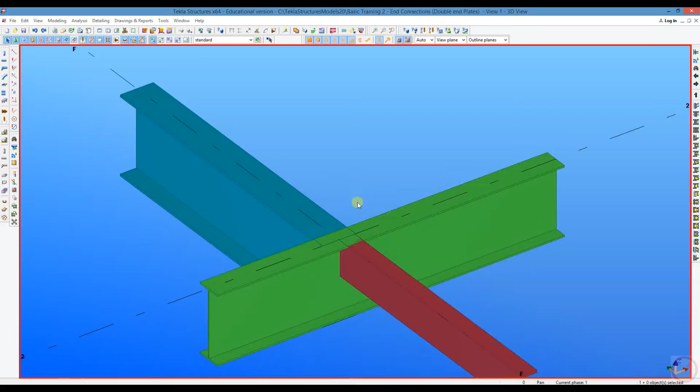Training number 2, end connections. Today we'll be discussing double end plates. Now, a double end plate is when a beam such as this needs to have an end plate on either side. That's a wee bit... nice sizes. Should make that one smaller.

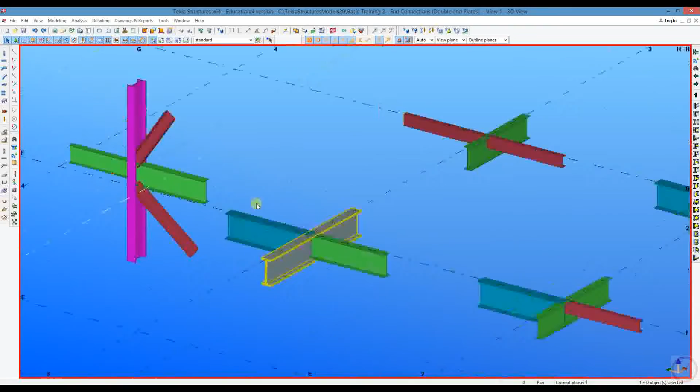Alright, so what I did here was set up a wee bit of variety. We've got a couple of different scenarios. So let's start with opening up the double end plate. It can be found here on page 1. Second connection, two-sided end plate 142.

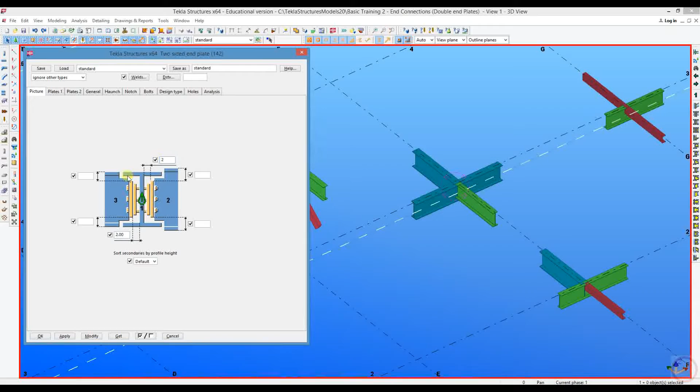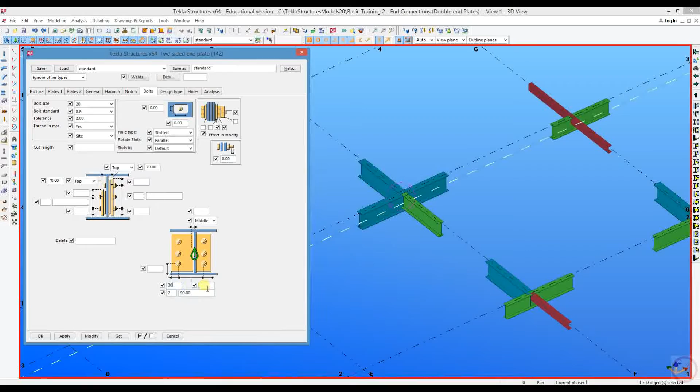Now, to start off with, I'm going to put in the standard 2 clearance. I'm going to make sure both plates have a thickness of 10, and then we get to the bolts. M20 8.8 2 tolerance. Okay, from top of beam, our first bolt will be 70 down. Now the amount of bolts, of course, is dependent on the beam that it goes into. Do 90 cross centers with 30 on a side, and before I do the rest, I'm going to put it in so long.

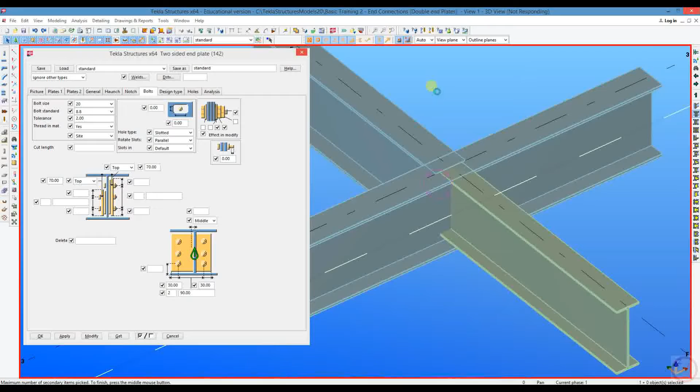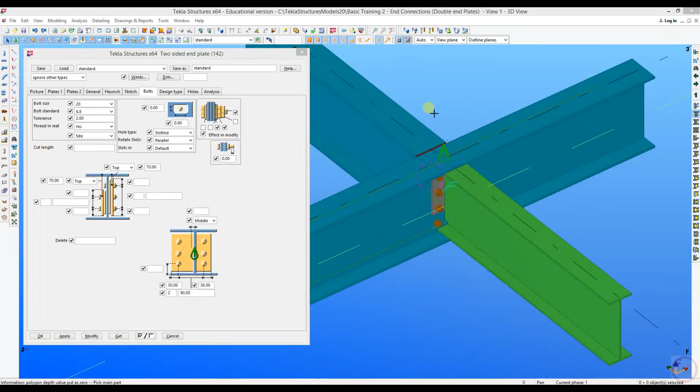Now, as you can see here, this connection, well, doesn't want to put in. Normally when this happens, it gives you a small menu. Just cancel it, do a quick undo, and put it in again. So the first time round, the computer can't calculate everything as it should. The second time around, usually it will work.

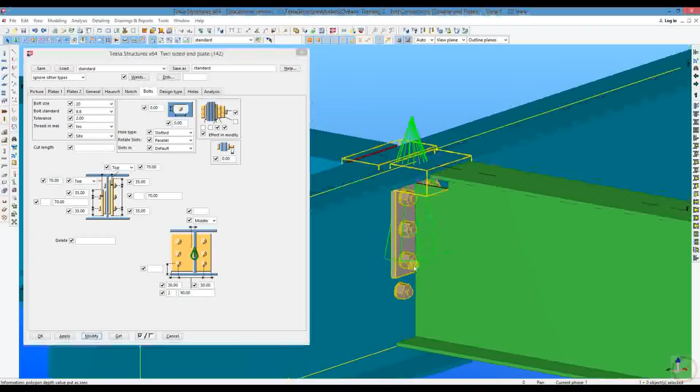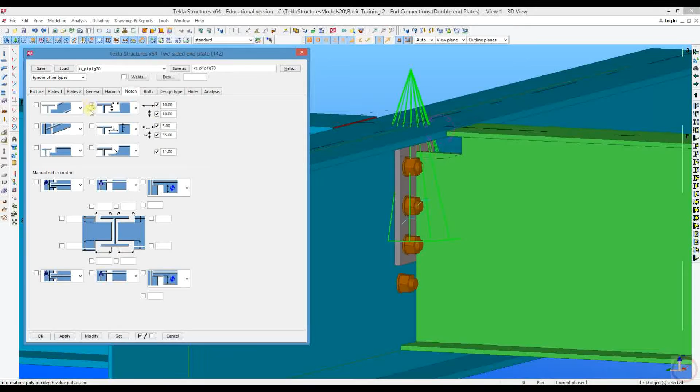Good. Now, next, we are going to put in 70 for the distance between the bolts, the standard 35s to the bottom and top of the plate. Now, before we get to the bolt amounts, as you can see, the notch is not exactly correct, so I'm just going to go in here and say I'm not in the mood to set up all of this. Normally you'd pick your choices, fill in the information. I'm just going to take one, load it, and I don't want any of the other information, only these ones. Modify. Excellent.

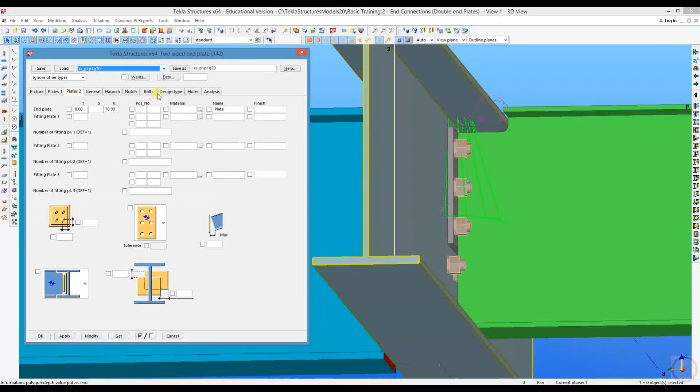Now the reason I don't use any of the other information is because, as you can see here, it does give length of the plate as well as the thickness. Unfortunately, all these plates have a thickness of 8, which we do not use. Okay, so now that I've done that, I'll just double click or say get to get all my settings again. Go back here and start working out according to 4.5.

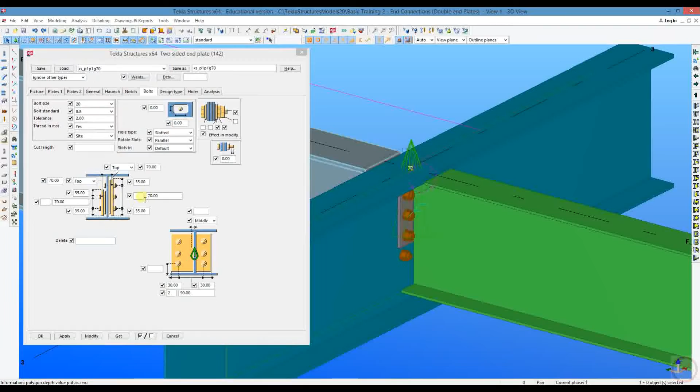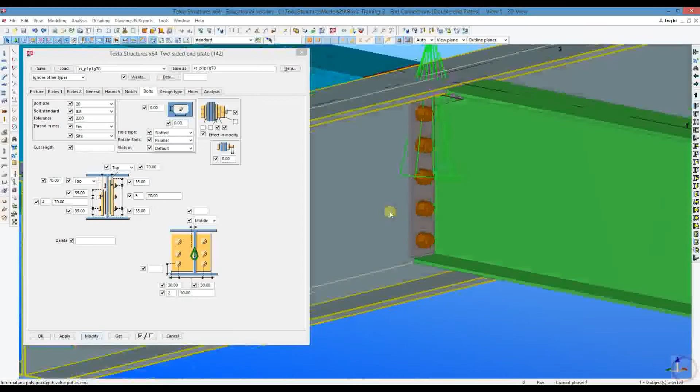This is 5 bolts. I'm just going to pick one side, put in 5, see what it says. Does it for both sides. Put 4 on the other side. Okay, now I know which side's which, and I can just swap them around. Usually this is determined either by the order they put in or largest one first. In this case, easiest is just to do it and see what happens.

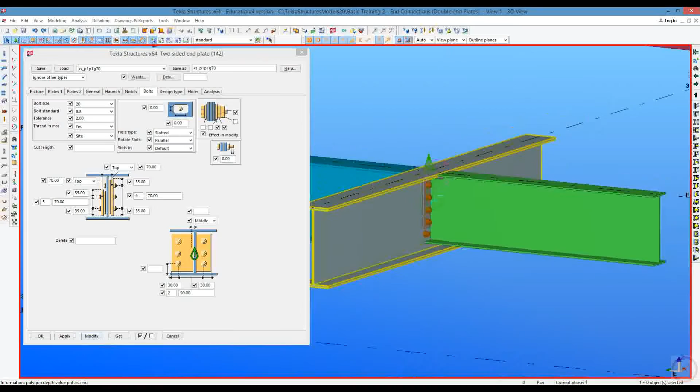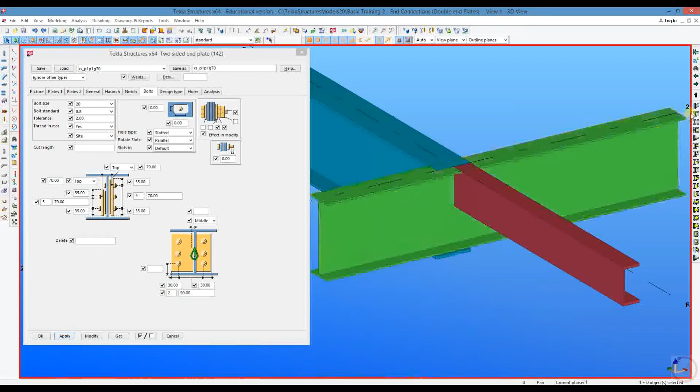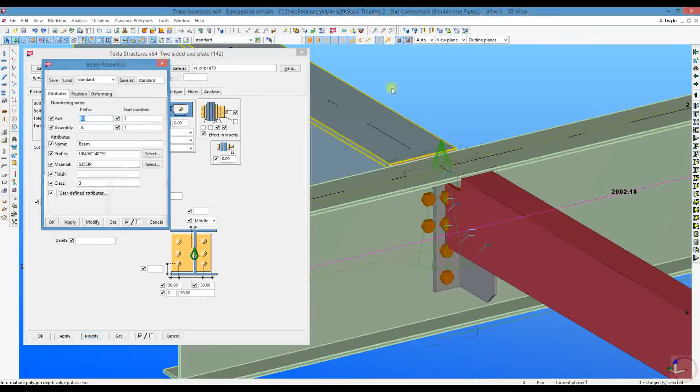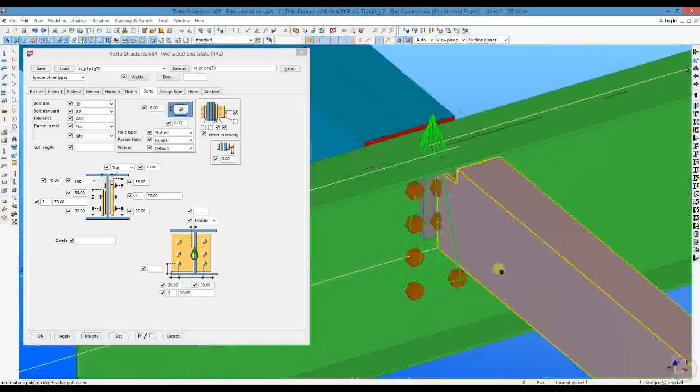Now, next, as you can see, it's the other way around. So that's 2, that's 4. We have a wee problem with alignment. These bolts don't align. So I'm going to get a direct view from the top, show you again. Here's our problem. Now, something like this, it's quite easy to solve.

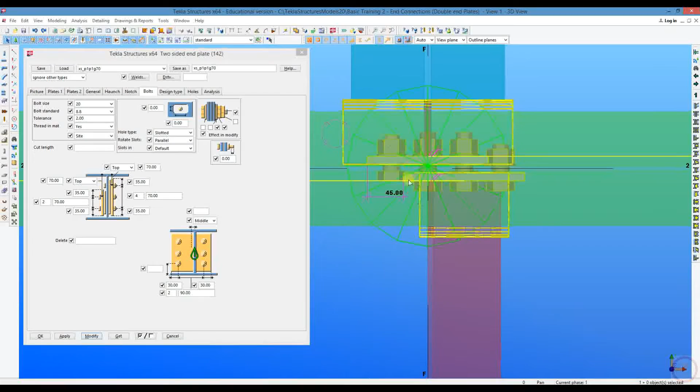What you'd want to do is get a measurement, usually from the edge of the plate or from center to center of the plate, and see what is the difference. Then if you go to plates 2, right here at the bottom, you can move one of the plates and thus align it with the other plate. As with most of these types of things, simply changing the plus and a minus will determine which way it goes.

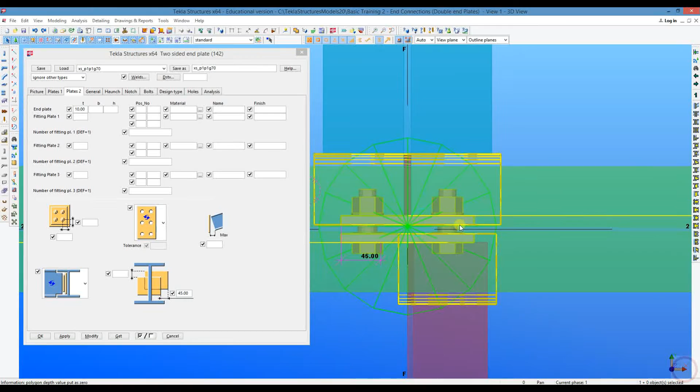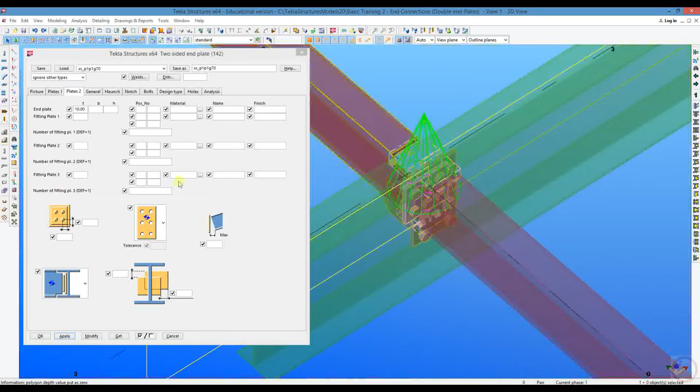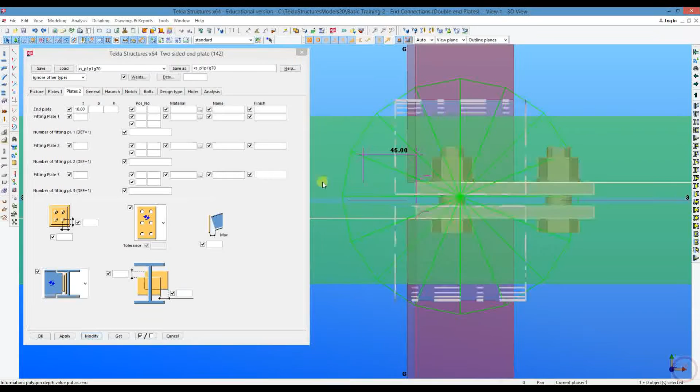Okay. Now, if for example, let's just put the base one again, you've got 2 channels. The process is very similar to a one-sided end plate. Let's just put the amount of bolts right here. In that, again, we need to align the plates. Actually, we need to disalign them. As I said, very similar to a single-sided plate.

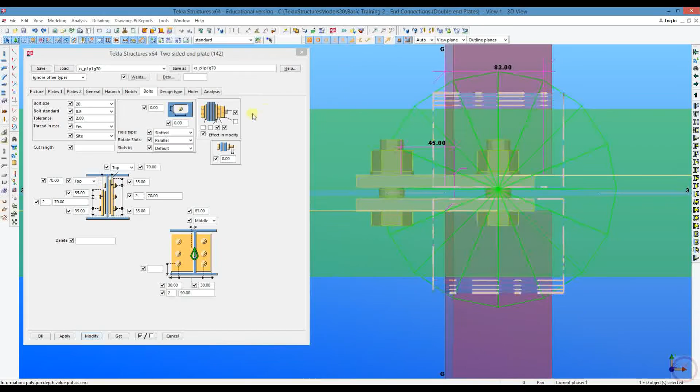The setting you're going to use to get these into the correct position will be, of course, center of the plate to the back, and that measurement you will put in here. Excellent. If a positive amount doesn't work, go for the negative. It is usually a case of either or, as with most of these.

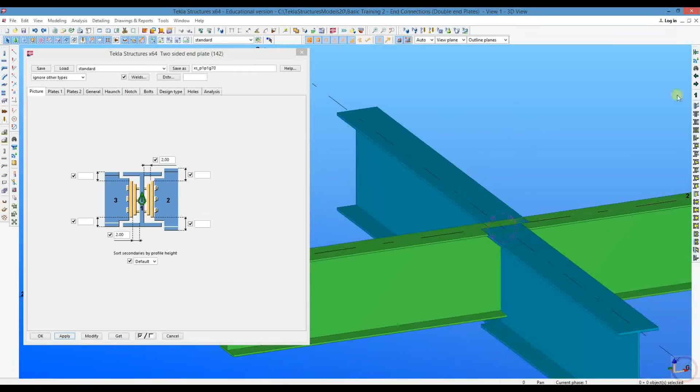Now, what I've done here is set up 2 beams that aren't aligned, both going into the same beam but at different points. From time to time you will get something in this line. Let's just open up the first one, get its settings. Put in the double-sided end plate and go look at the problem we got, which is they don't align.

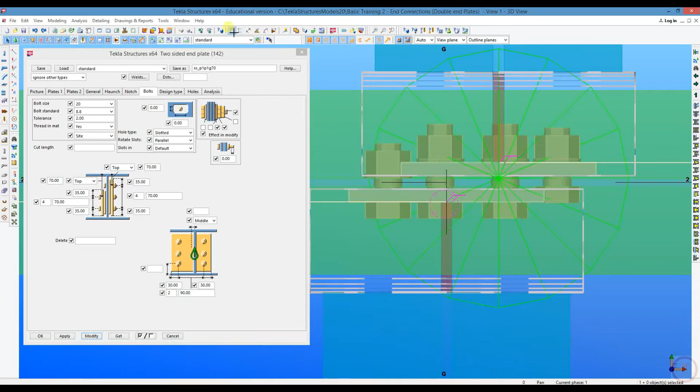Now, standard procedure, same as Tekla. First thing you want to do is align these 2 plates. Now, normally the difference between these 2 plates will be the difference between the 2 beams. Quite easy to work out. If not, just measure. So in this case, this is going to be a minus.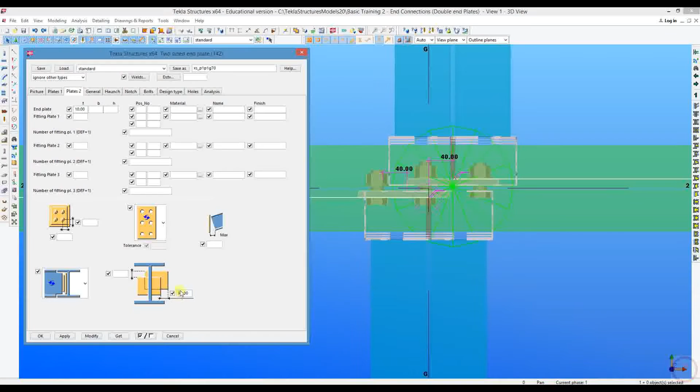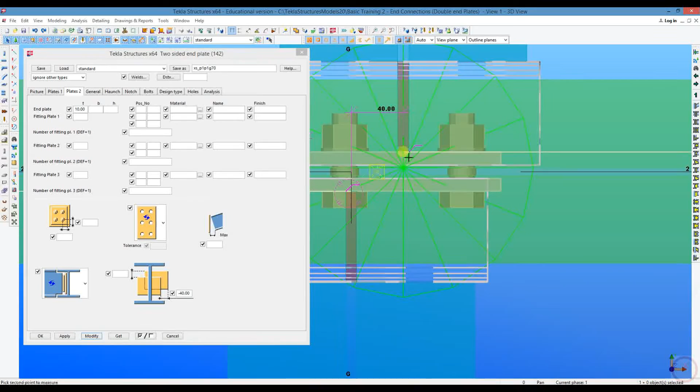Right, now that the 2 of them have been aligned, secondly, we wish to use the middle of these 2 as our midpoint. So I'm just going to put a point, the 2 centers. Again, just a simple measurement. And that should give you the amount to the side.

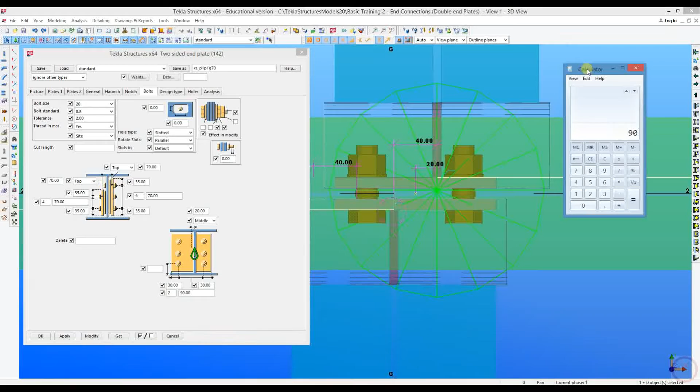Now, as for our last problem, you can see that a standard cross centers no longer works. So, for something like this, you will simply take the standard cross centers, which is 90, and then add the difference between the 2 beams, 40 in this case. Give us 130. Go. And this will give us from the center to the bolt 65.

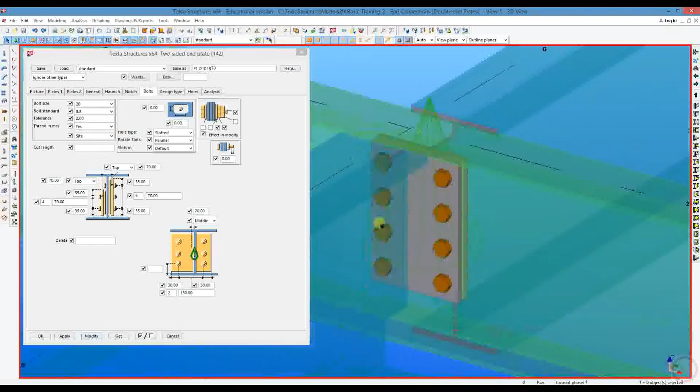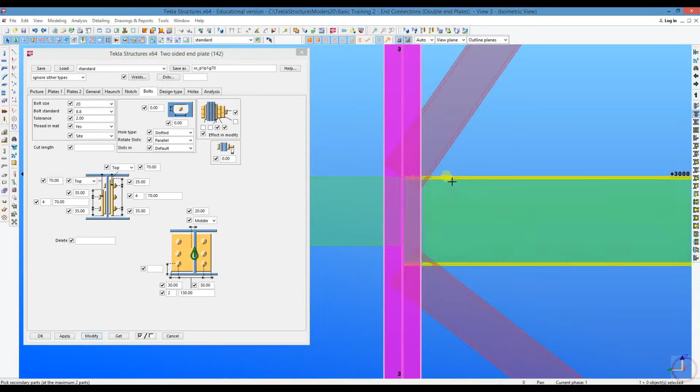Okay, so fairly simple solutions to a variety of problems. As you can see, it goes off to the one side and one side, but that can unfortunately not be helped. Now, for our last one in this exercise, I'm going to show a double-sided end plate when bracings are involved. Same as before, put it in,

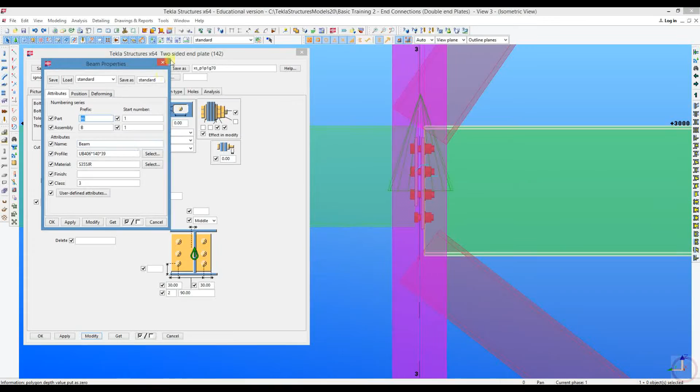find which one is bigger and smaller. In this case we've got a 305, 3 bolts, so that's this side, a 305, 3 bolts. That side we've got a 406, which is 4 bolts. This will give us something in this respect. Now, as you can see, this bolt is very close to the bottom here, 20, which is less than preferred.

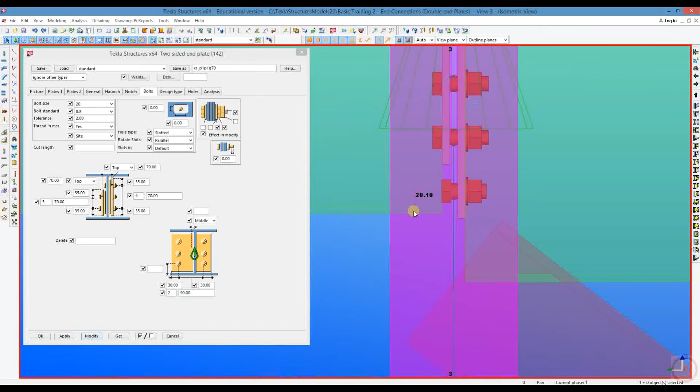And normally, in a case like this, you will need to cut out a small little haunch here at the bottom, something like just 40 back, just to make installation easier. Now that will be done with a simple poly beam. From there, take 40, cut it down, to give us that. This gives us a nice open area to allow for the fastening of this bolt.

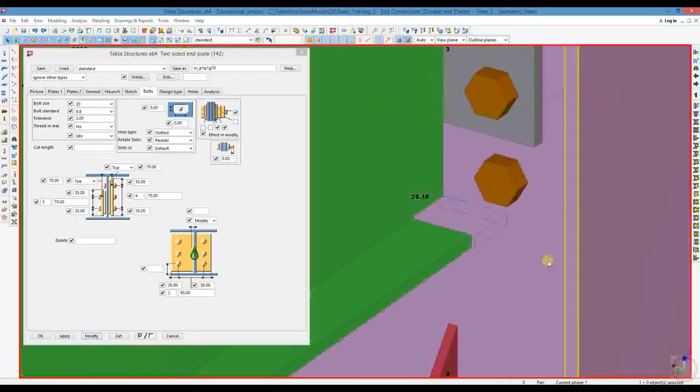Another method, of course, if you've got the space for it, is to take a measurement between these two. If it happens to be more than 110, you can just move that bolt down in between them. In this case, it's not more than 110, therefore it's not possible.

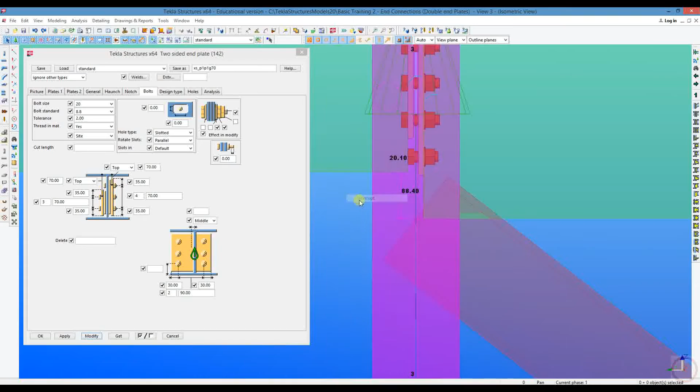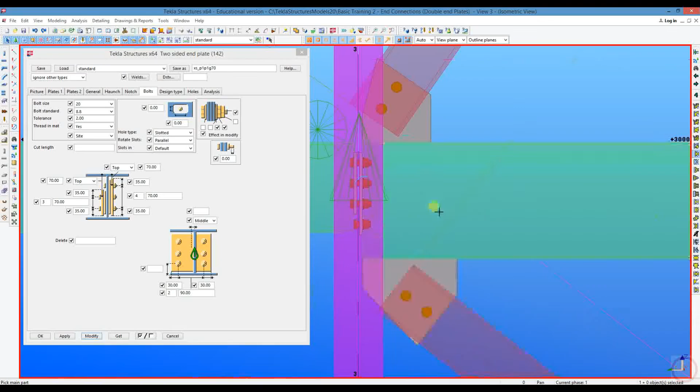Okay, now, next up, I'm going to make some modifications to accommodate our two bracings. I'm just going to put a standard connection in here. I'm not really too worried about getting the connection right at the moment, as this is about the beam connection.

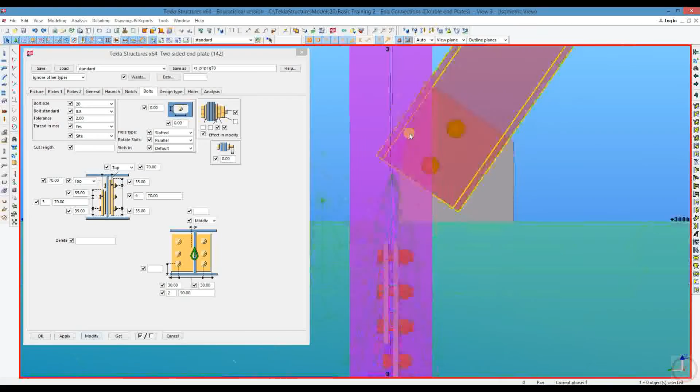Take out this completely. In a case like this, always remember, Tekla only does its clearance from the one side. You will need to increase that clearance until the other side's clearance is correct.

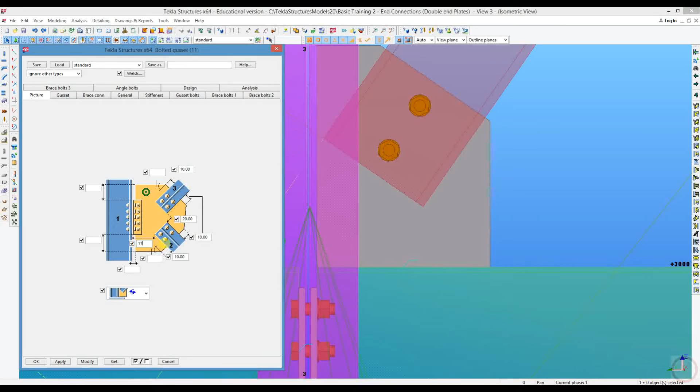This has to be between 16 and 20. It is really good. That will suffice. Let's try this side. I'm going to shape the bottom. 138.6. It's not bad. It's not going to be a very nice number to use.

So, minimum from there, from the bottom to the first bolt, it's going to be 55 plus the 35 to the bottom, which is 90. So that's less than 90. Yeah, 90 is less than the amount given. So let's change this to 70 plus 35, 105. Okay, that's going to be just a wee bit too short.

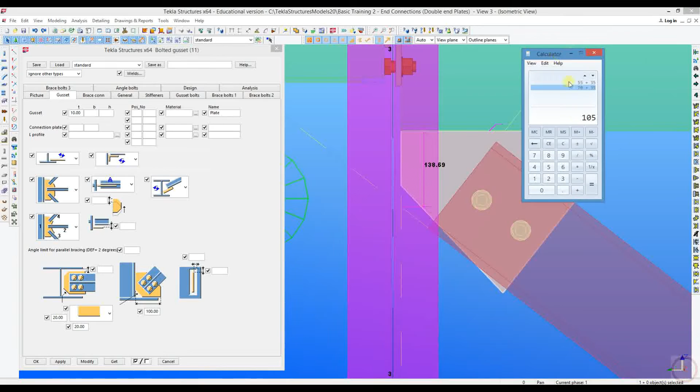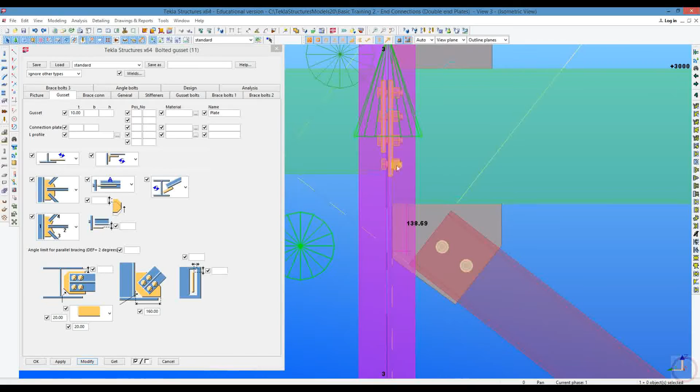So I'm going to say 55 plus 70 plus 35 gives us 160. That's a good value to work with. I'm going to make this 160. It's a little bit more than measured, but it falls nicely within a set of round numbers. Makes this a lot easier. Here at the top, I'm just going to leave it squared off. We'll just have to remember to miss this bolt completely.

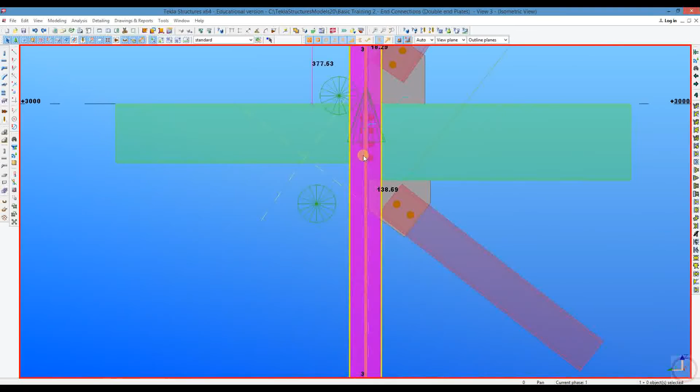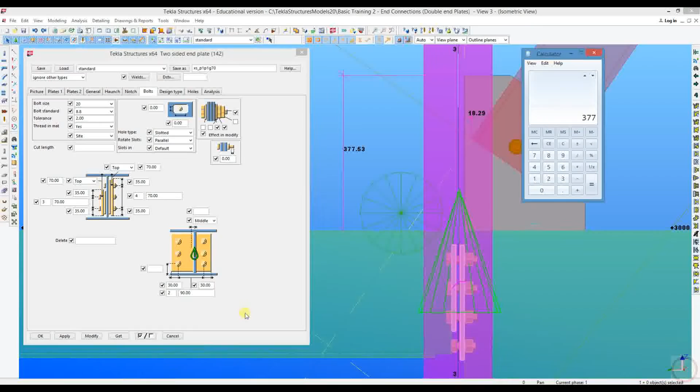Now, as for these calculations, first off, getting the distance. Once you've got this distance, you've got the side with the 4 bolts, our first bolt is not going to be 70 from the top, but 377 less 35. So 342. So my first bolt's going to be up here.

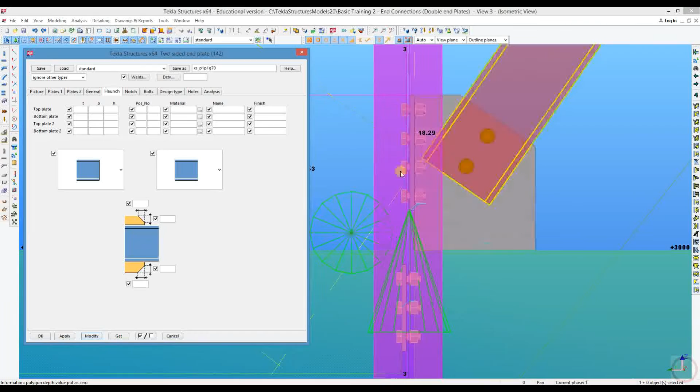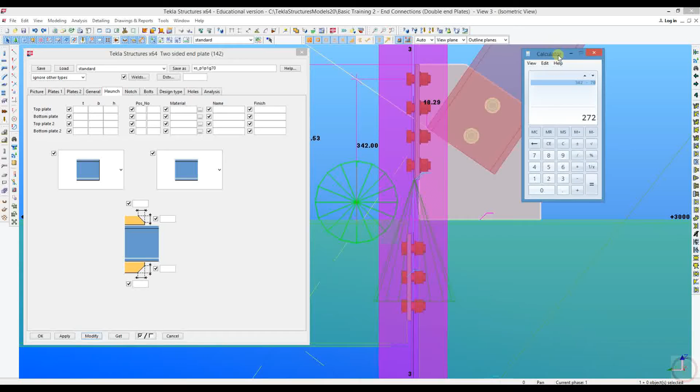Now, as soon as I did this, the beam's haunch comes into play. Now, I don't want this haunch, so I'm just going to take these off. So just a single plate leaves it open for our gusset. Now, between our bolt and there is 342. Our bolt from here is going to be 70, so 342 less 70 is 272. It's not a bad distance.

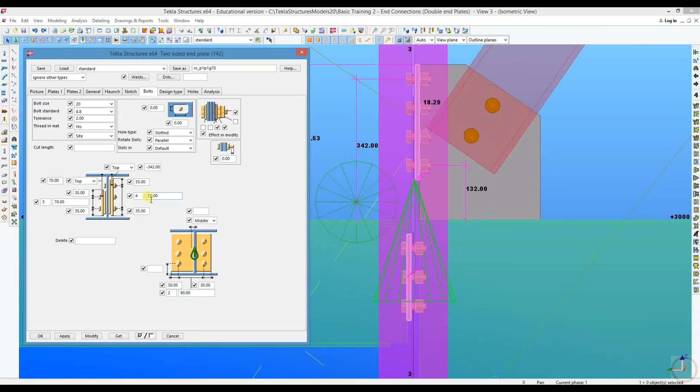I will want to have a couple of bolts in between. These bolts are acceptable positions. Let's see, what's this distance? 132. Bad. Let's divide this by 70, get a rough estimate of 4 bolts. So we take this, we divide it by 4, that's 68. So first distance is 68. We'll have 1, 2, 3 of those.

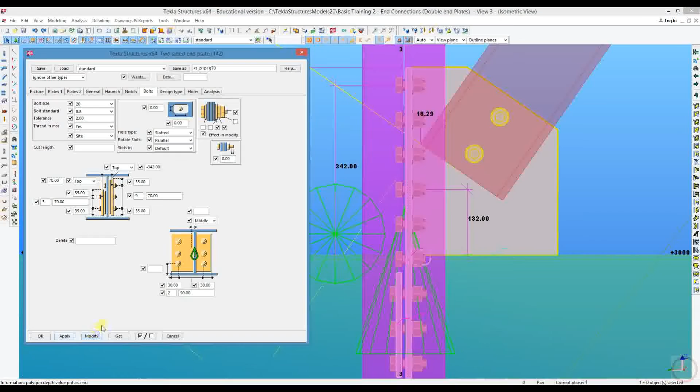Let's see where that comes out. Let's make this just a couple of more. The exact value is not important at the moment. So 68. As you can see, the second one doesn't really add up. So let's make this 70. Increase this one to our maximum of 110 just to get rid of that.

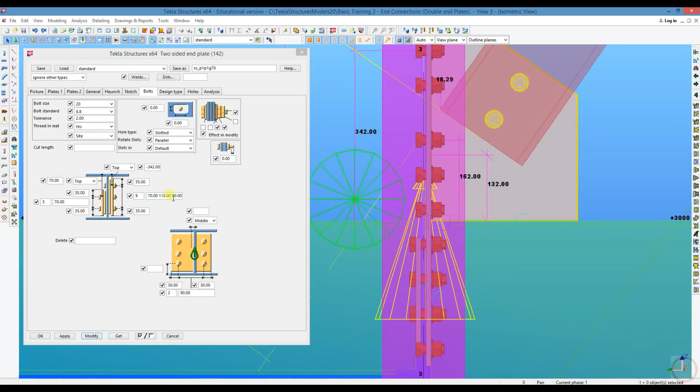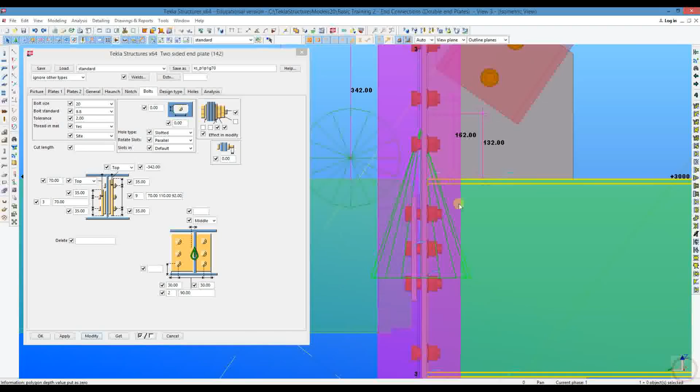From there on, let's work out the difference between these two. It's 162, 162 less 70, it's 92. Okay, so 92. Going to be 140. The reason it's 140 is because it's 70 to there and then 70 to the next bolt. From there, we're going to have 1, 2, 3 at a distance of 70.

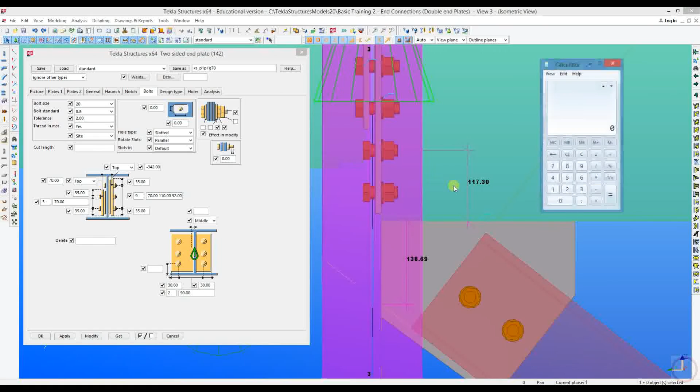Now, for our next distance, we'll have to take a measurement. We're going to measure the distance from there to the bottom, 117. Now 117 plus, we said 55, so 117 plus 55, 172. Next distance is 172, then after that 70 again.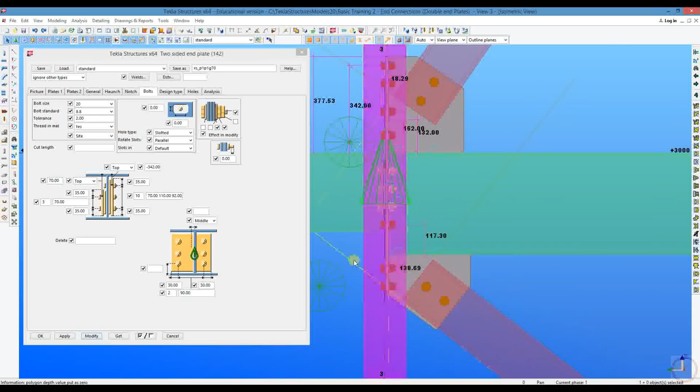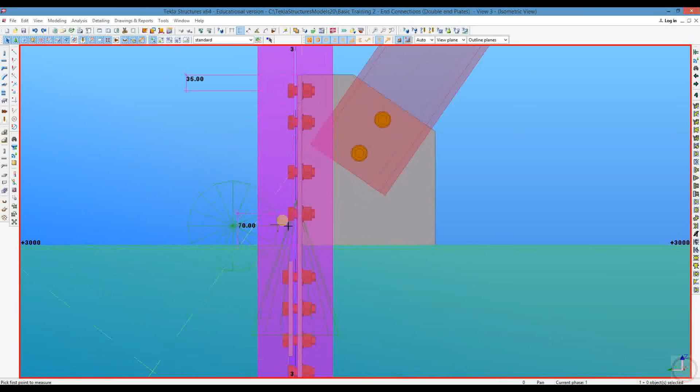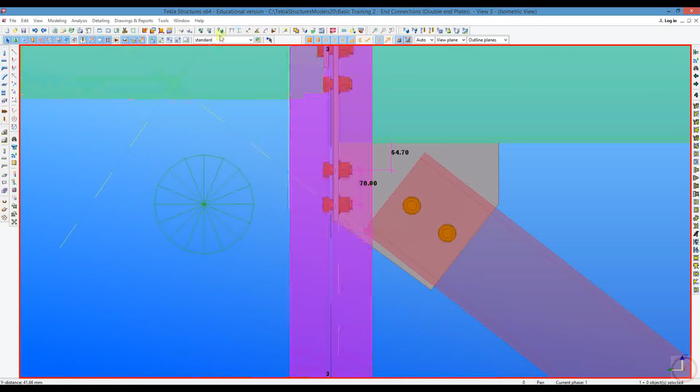As you can see here, we've got quite a lot of different numbers. In the end, it does work out. We've got our 35 from the top, we've got our 70 from the bottom. These bolts are divided in to fit properly. Nothing is more than 110, nothing is less than 55. Acceptable values. Then we've got our standard 4 bolts at 70 each. After that, we've got a 55 from the bottom flange and a 70 with the 35 to the bottom of the plate.

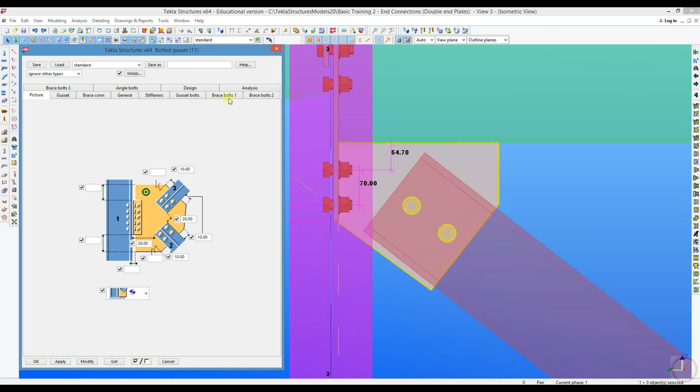If you look here, this number is 54.7. It's not a round number. Tekla will round it to the nearest 1 millimeter, which is 55. So that's not going to be a problem. If it does bother you though, it's very easy to fix. You'll simply need to add the 0.3 to this value, and that should give you a nice round number. Alright. I think that's it for double-sided connections.